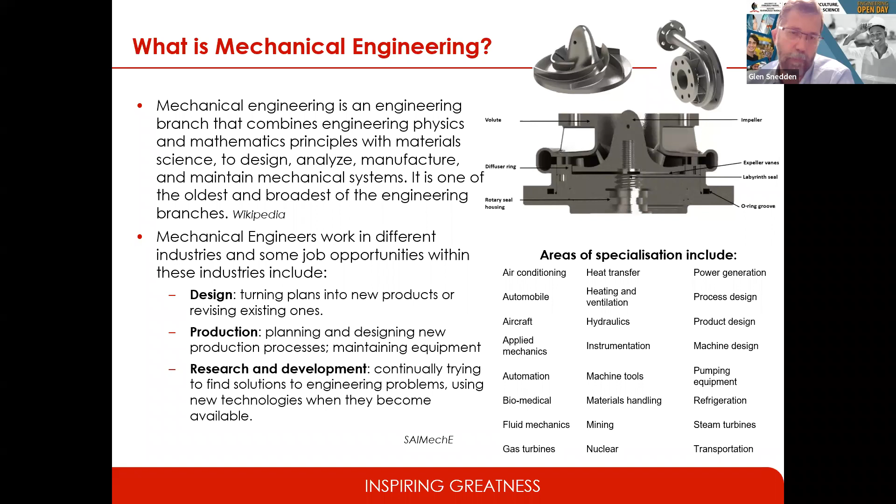These definitions are very wordy and off-putting. I rather prefer the more whimsical version given by Terry Pratchett: they had dreamed in a way that people usually use the word - not dreamed in the way people usually use the word, but they had imagined a different world and bent metal around it. That, to me, just sums up how engineers think. They take an idea, a dream, a possibility, and they create it from scratch using the tools at their disposal.

I just want to reiterate what the Dean has said: engineering is critical to growing the economy.

We've heard recently from President Ramaphosa how critical it is to grow the economy and how important it's going to be for our future as South Africa. And you're not going to achieve that without engineering. There is always going to be a strong drive for growing the engineering base in the country in order to grow your economy, to grow your jobs.

So I'm just going to take you on a little tour of what mechanical engineering is at UKZN and how we have deemed the discipline of mechanical engineering at UKZN.

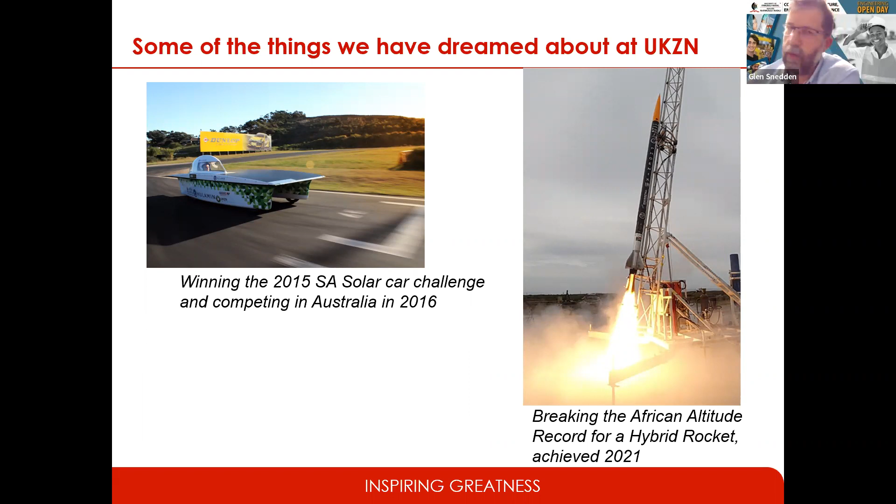And those are the projects, but behind those projects are the engineers who have dreamed them up. And those are the two teams. These are largely postgraduate teams by the time you get to breaking the record, but they all started off as smaller engineering projects in their fourth year at university.

So let's talk a little bit more about how you become a mechanical engineer and what mechanical engineering means at UKZN.

Firstly, we offer a Bachelor of Science degree in mechanical engineering. So you would graduate after 4 years with a BSc engineering degree. So it's an automatic honors degree, if you like.

Secondly, as mentioned before, it's an accredited degree. It's a 4-year program, fully accredited by ECSA until 2024. What happens in 2024, you ask? Well, we get reaccredited, and we are very, very confident that that will happen. I myself am an ECSA accreditor. Obviously, I don't take part in the accreditation of our own degree, but we have plenty of experience with this accreditation, and we know the quality of our degree.

Secondly, our degree is based on the Howard College campus. And that means it's local to KZN, don't have to go anywhere. It's right here in your backyard. You can get a world-class degree and work anywhere in the world afterwards by going to university right here in Durban.

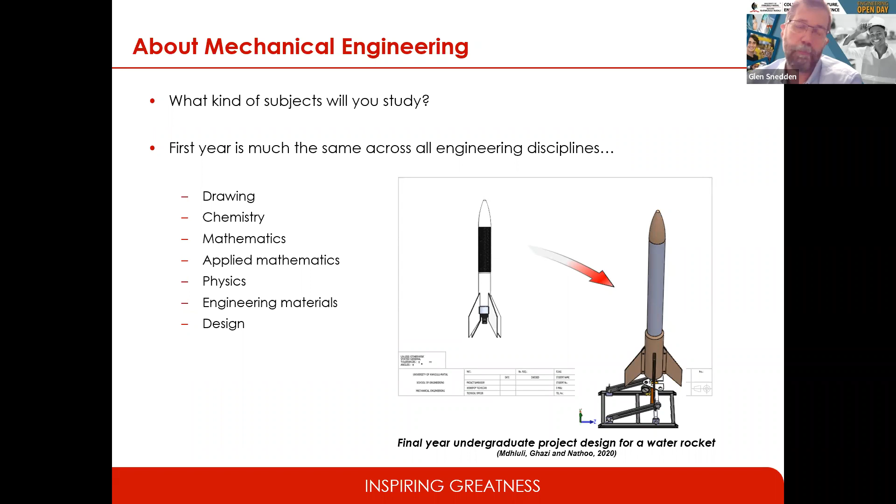So from second year, you will start to specialize in mechanical engineering. Now, what does that mean? I'm going to, as the Dean had suggested, use our own project, my own research group, which is the Aerospace Systems Research Group's project, to have a look at what that means. But you can draw examples from any one of our areas, from robotics, manufacturing, energy, biomedical research that we are doing in the department actively at our postgraduate level.

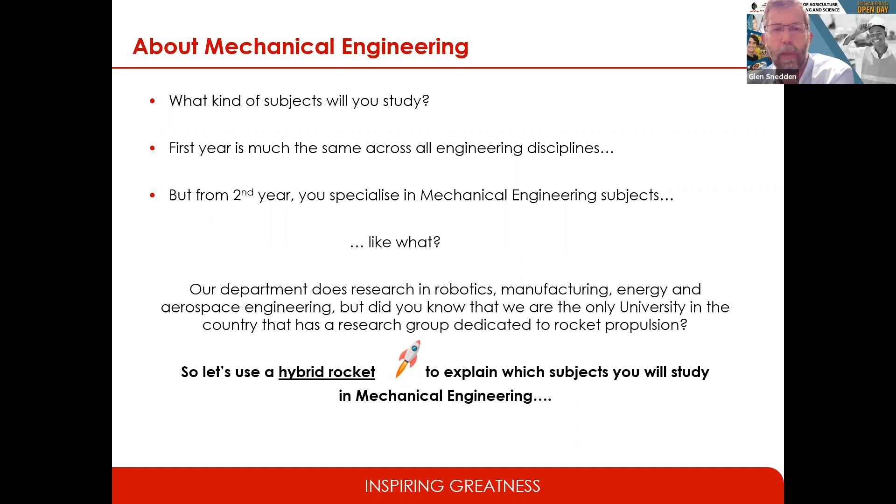And we're going to use a hybrid rocket to explain those subjects in mechanical engineering. So the first one you're going to do is design. As I said, an engineer uses maths and physics, but differently. A physicist might produce a fractal or look at some interesting corner of physics. An engineer will take that interesting corner of physics, figure out how to use it in practice, and turn it into a product.

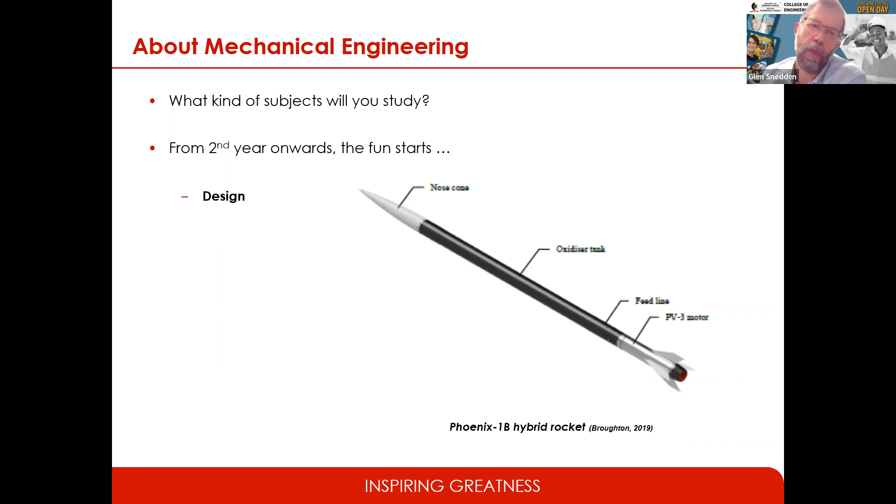In this case, there's our Phoenix rocket. That's the rocket that broke the altitude record. And every single aspect, every shape, every nut, every bolt, everything on that rocket has been designed according to the principles taught in second, third, and fourth years.

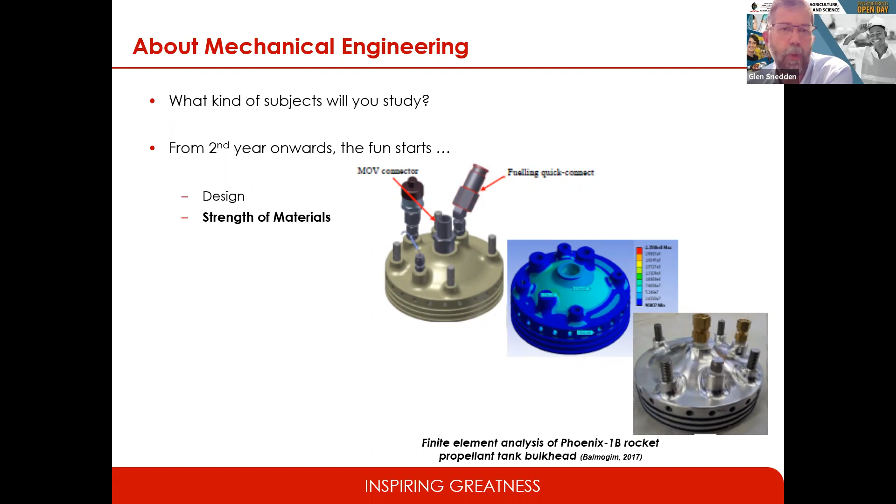But there are other aspects to dynamics. There's vibrations and mechanisms such as four-bar mechanisms. Your windscreen wiper on your car is a dynamic mechanism that needs to be analyzed and designed.

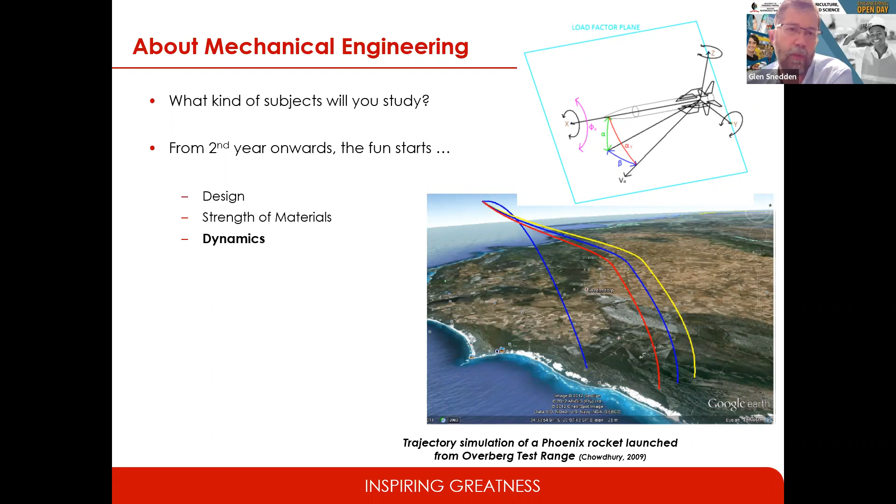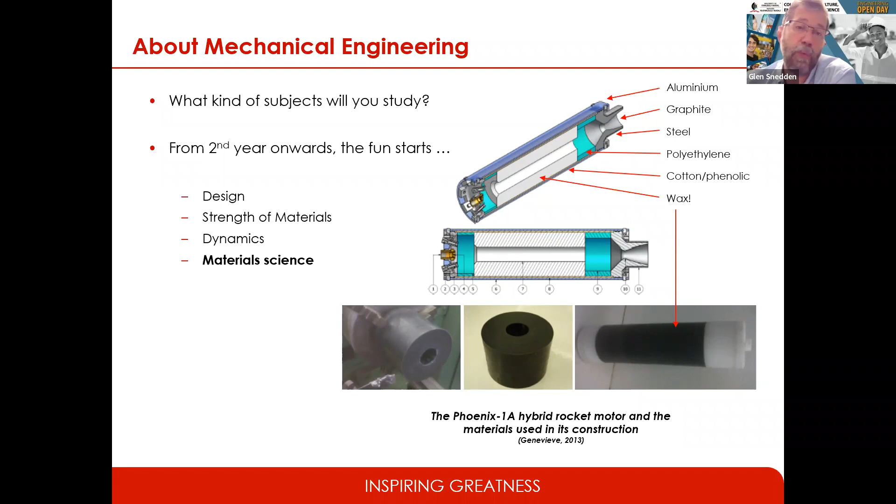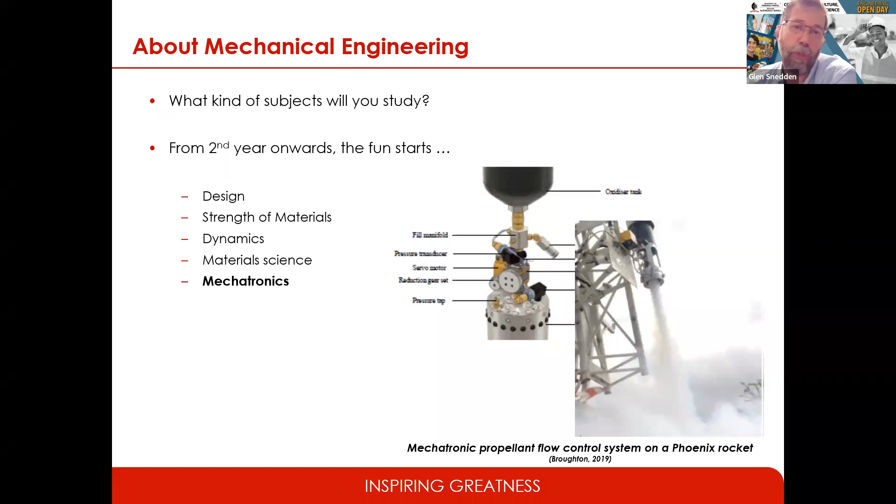Mechatronics. Many universities offer a mechatronic degree. We offer it at postgraduate level, and it's integral to our course in terms of the subjects you will do in third and fourth year. This is a mechatronic mechanism on the rocket: the valve that is used to open the oxidizer line into the rocket motor is controlled by an Arduino board, and it's a mechanical device with control, which is essentially what mechatronics is.

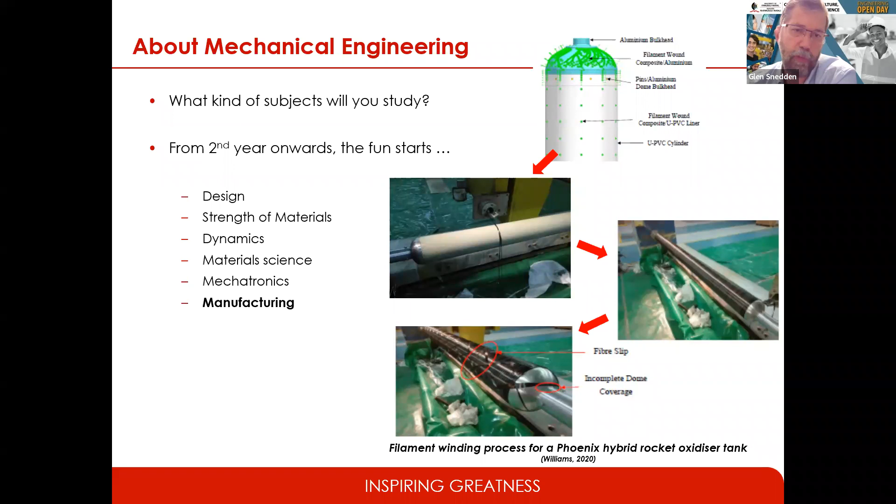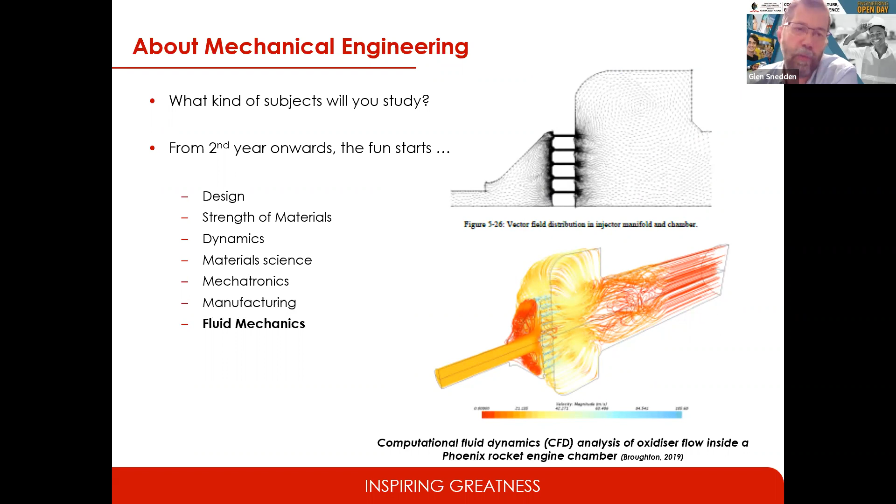Fluid mechanics, obviously it's a rocket, there's a lot of fluid mechanics going on. There's the aerodynamics of the rocket itself, but there's also the fluid mechanics of the injector going into the combustion chamber. Very complicated flows that can be analyzed using modern techniques.

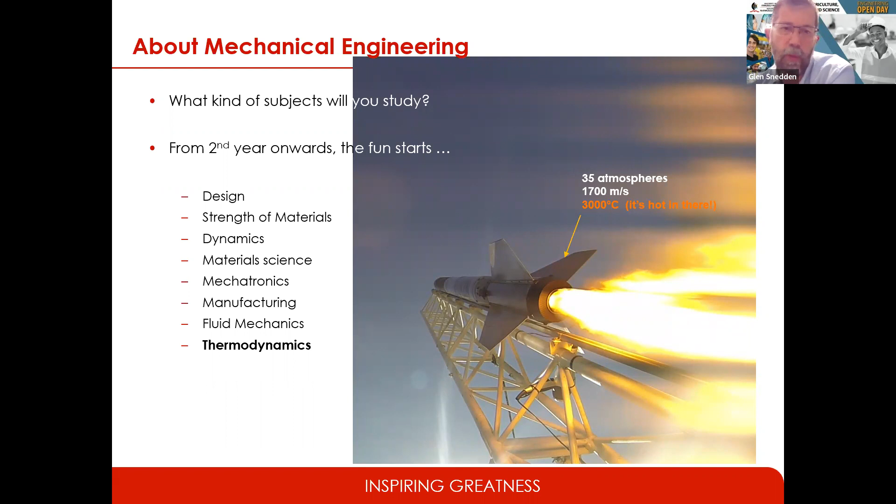And finally, thermodynamics. This rocket sees 35 atmospheres and 3,000 degrees Celsius coming out of that rocket motor. So there's a lot of high temperature effects. The design of the nozzle, for example, is all part of thermodynamics, the fundamental laws of the universe, all thermodynamic laws.

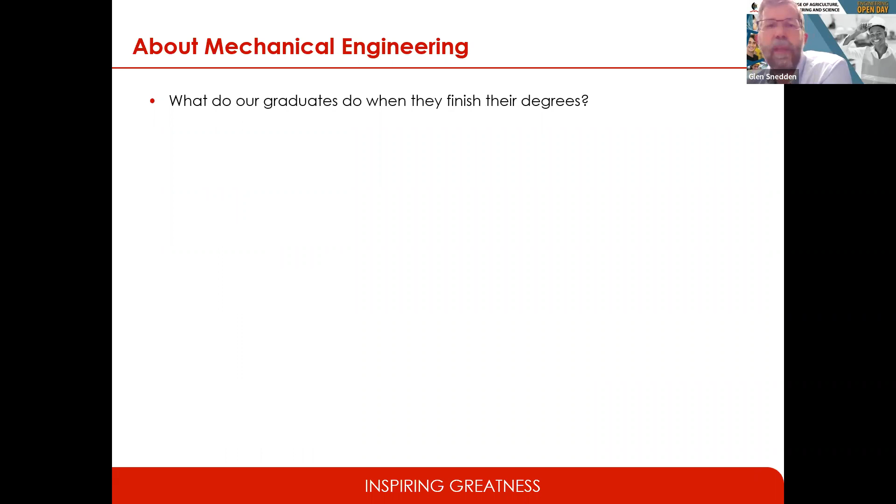So what do our graduates do when they complete their degree? Well, they work just about everywhere, in any industry you can think of. We might think of the petrochemical industry as being the domain of chemical engineers, and so it is, but there are a large number of mechanical engineers that go into that industry. Umgeni Water, Eskom, they all require mechanical engineers. In fact, you can probably trace some of our problems in this country to the lack of mechanical engineers working in these environments. So there is a great demand for engineers.

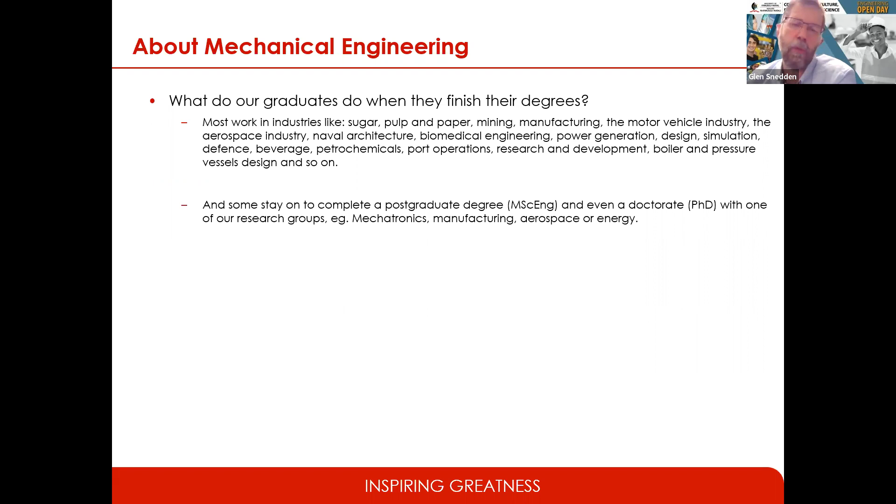Some graduates will stay on and do postgraduate research, either an MSc or even carry on to do a PhD. Here they will work in one of our research groups, which at the moment is largely focused around mechatronics and manufacturing and aerospace and energy. But there are also research groups in biomedical and drones, for example, and we do some materials research. In fact, it's very little known, but UKZN now has the largest aerospace research group in the country. So while you cannot do an aeronautical engineering degree here, which is really a specialized version of a mechanical engineering degree, and you can do that up on the reef in Wits, ours is actually the biggest aerospace research group in the country.

So engineering is really a very scarce skill, and we are certainly amongst some of the highest paid graduates in South Africa. It's a professional degree, and your skills can be used across the globe. So if you're good at maths and physics and you have a dream of designing the next big product, then why not come to UKZN and join in our dream?

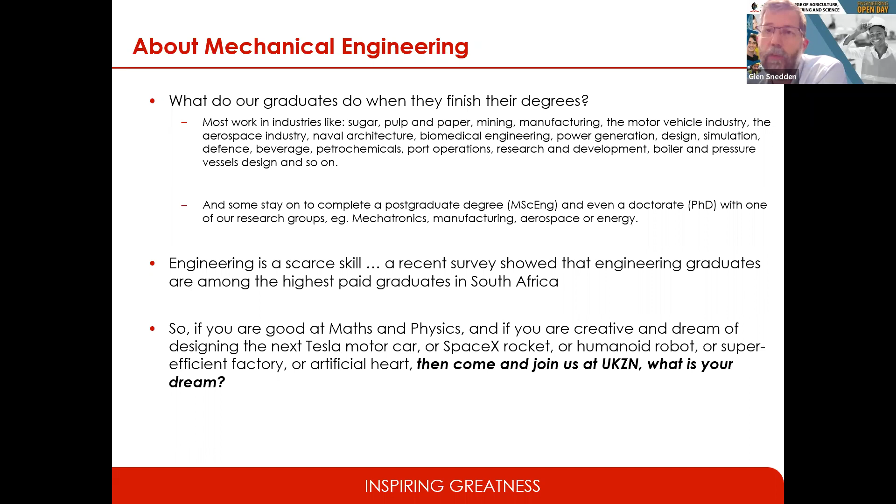And really, the sky is the limit. So there is our website, and there is the sky is the limit. There's our rocket launching on its way up to 18 kilometers.

But I also want to take this final slide just to mention what's coming. The Girl CAD initiative is starting up again, and I really want to encourage you to participate in that if you are one of those young ladies who is concerned about doing engineering because you've not had the opportunity to do engineering drawing at school. It isn't a problem, and we are offering a crash course in it.

I also want to say that as of next year, I'm hoping we will start up our engineering winter schools. That's exactly how I ended up an engineer, was going to an engineering winter school at UKZN. You'll be able to interact more hands-on with what the course is about. It might be too late for some of you, you have to make your decision now, but I would encourage those that have a little bit more time to actually take those opportunities. Thank you very much.

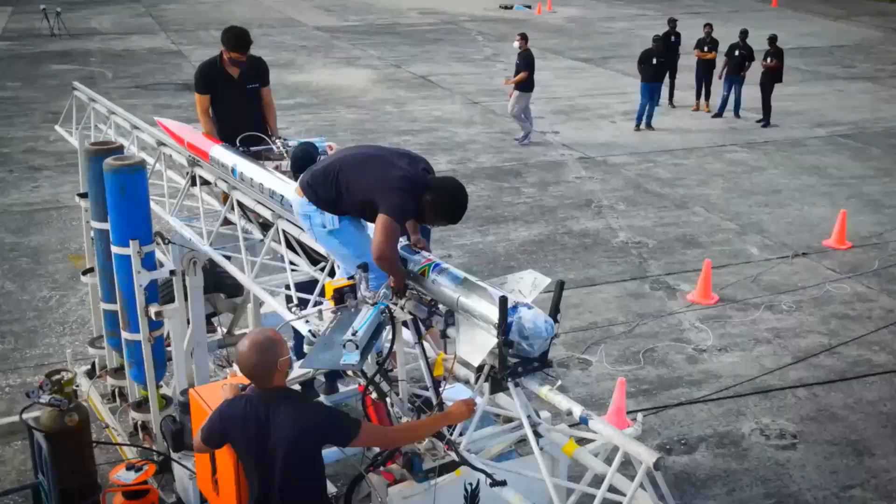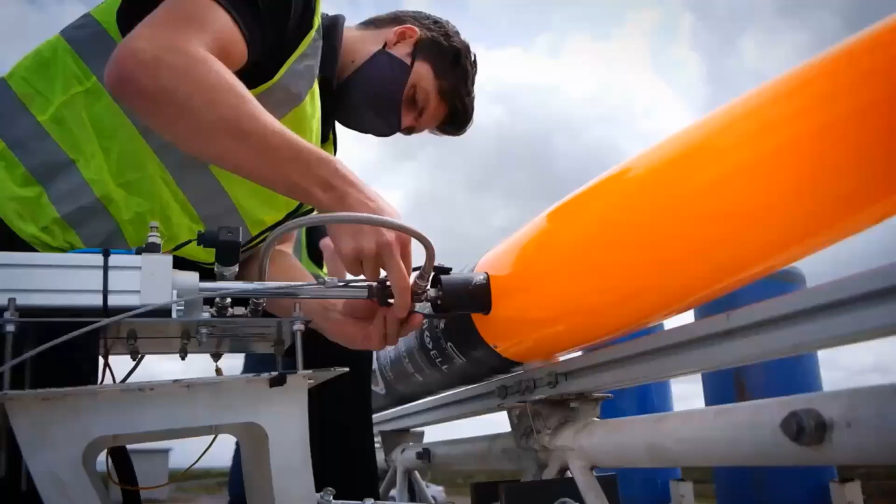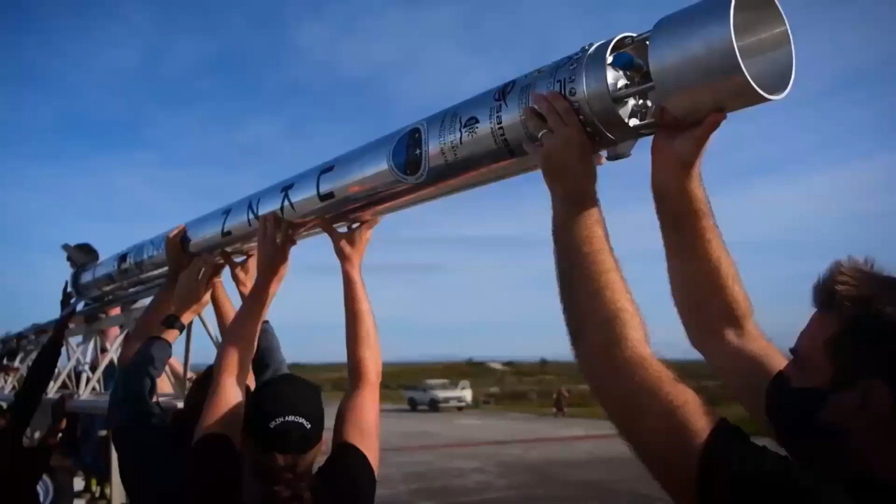The aim of this campaign is to test two rockets. We've got the Phoenix 1B Mark II-R, which is our high-speed rocket, and we're going to try and break the African hybrid rocket altitude record with that vehicle. The second rocket is a Phoenix 1B Mark I, more of a test platform to fly telemetry systems and recovery systems, and that will be a low altitude shot. We intend to learn as much as we can from both of these flight tests.

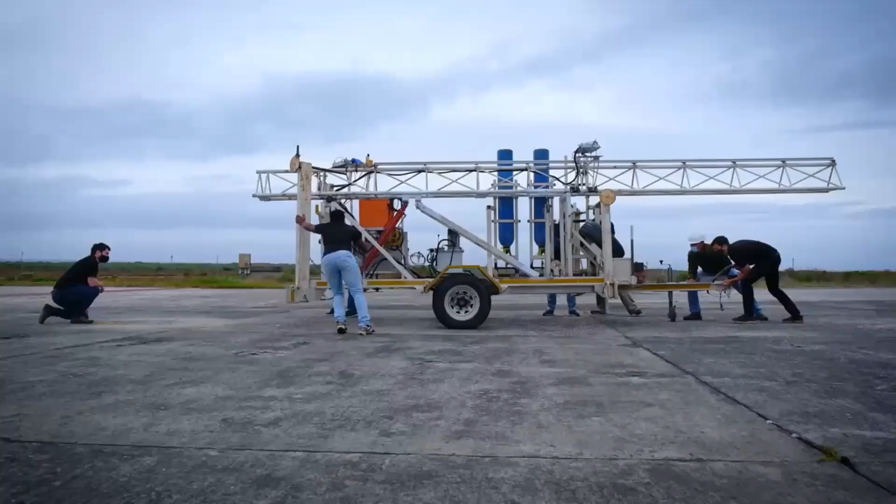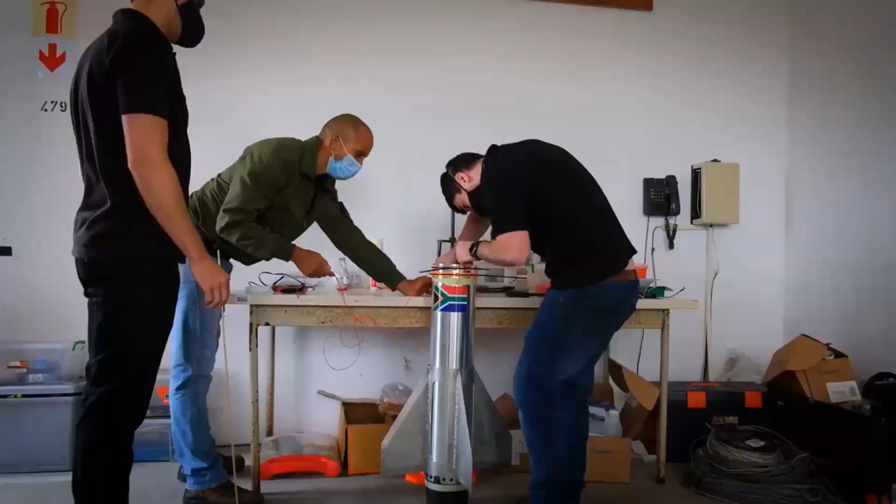Today we're launching the Mark II rocket, which is looking to break the South African hybrid altitude record of about 10.3 kilometers. So this one we're going to push to about 18 kilometers today, depending on wind. My name's Kai Broughton. I'm the lead engineer on this Phoenix hybrid sounding rocket project. I'm leading a team of approximately 10 engineers working part-time.

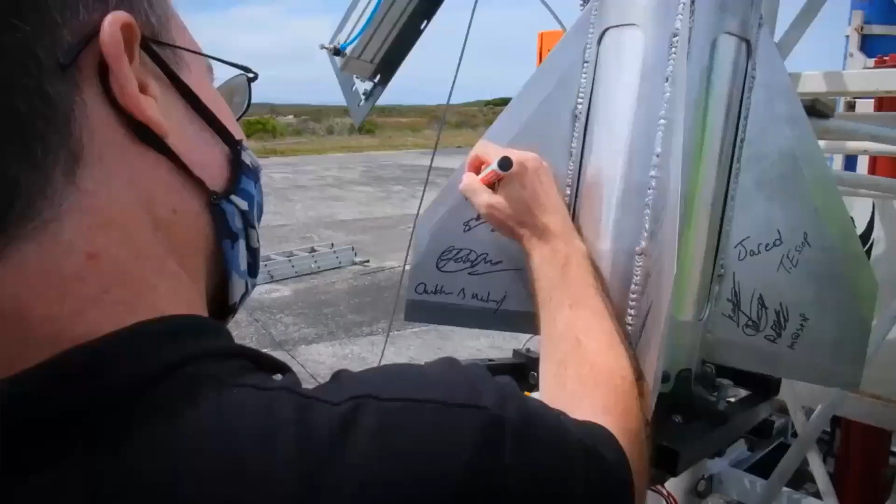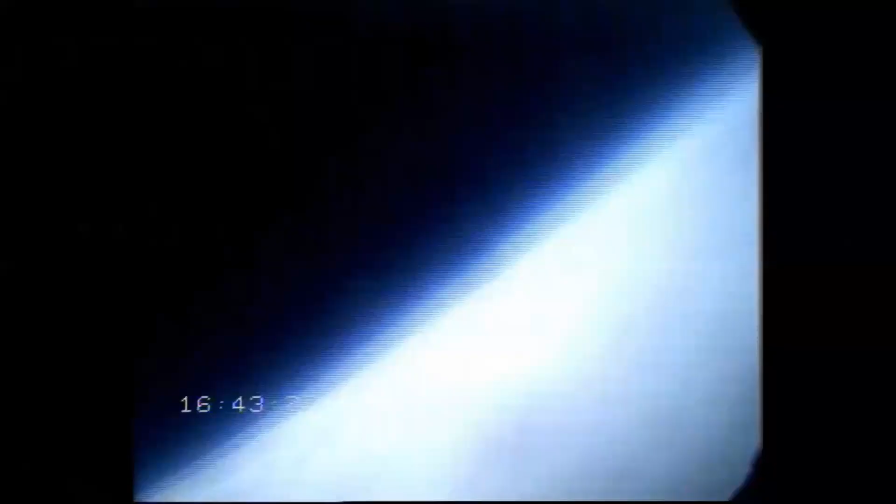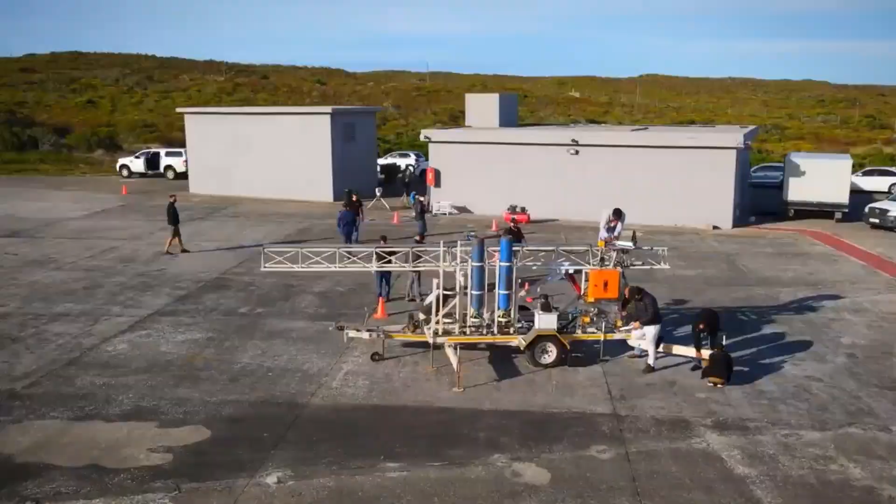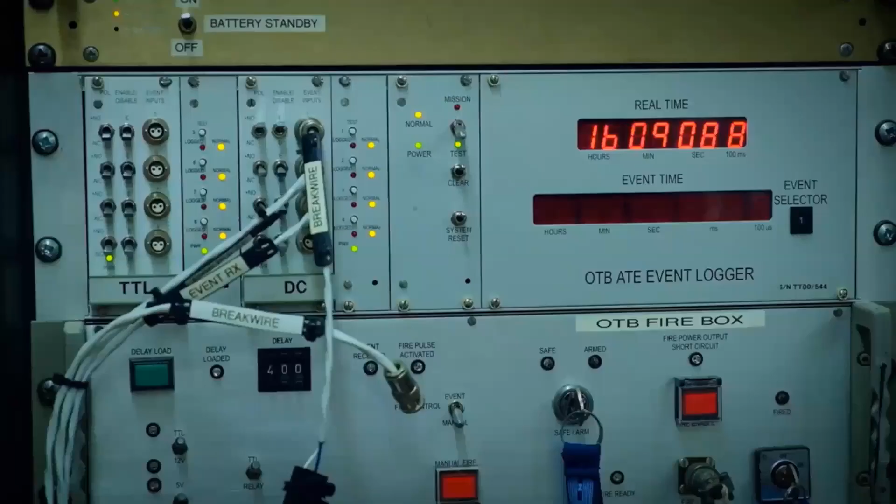Ready on your mark. Everybody stand. 9, 8, 7, 6, 5, 4, 3, 2, 1. Ignition.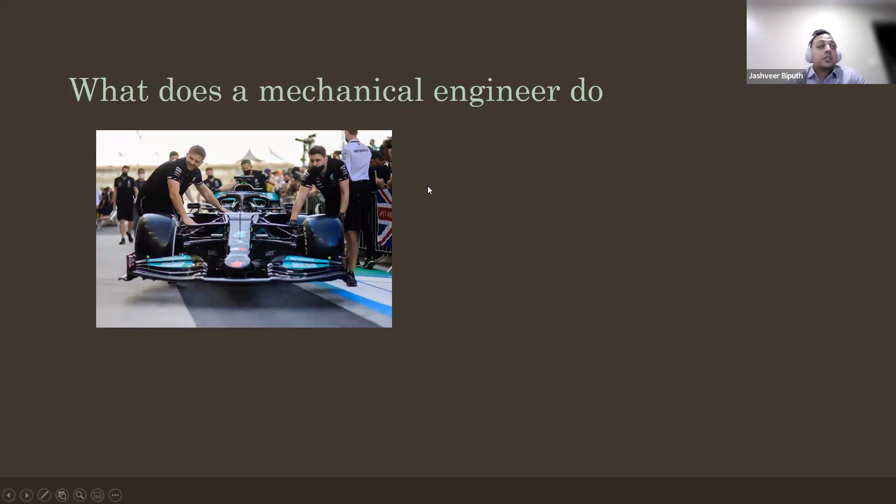So what does a mechanical engineer do? First of all, I think this is a great platform for young learners. I don't think I had it when I was at that stage, but when I was in school, like most of you are, this is what I thought mechanical engineering was about. I thought I was going to work for a Mercedes F1 team.

Obviously, some still do, and then later on you think, okay, maybe you're going to make a Falcon 9 rocket like Elon Musk. Or if you ask my parents at the time, they'll probably tell you you're going to be a car mechanic, which is totally not right. But what do mechanical engineers really do? So mechanical engineering is actually one of the broadest fields of engineering that you can find. Some of the careers we can read on the left-hand side as such, but I think in the South African perspective, if you're looking to stay in this country and work, I think the major

career paths that you take is either automotive, where we have a number of automotive plants in the country. We have Mercedes-Benz in East London, we have Toyota there in Durban, there's BMW in Rosslyn, Pretoria. Energy - Sasol, one of the biggest petroleum companies in the world, groundbreaking technology being used there, just all here in South Africa.

Manufacturing - we have major manufacturing companies, like ArcelorMittal for steel. We have fast-moving consumer goods in the form of Unilever, RCL Foods, etc. And then mining, which is a big part of South Africa - we have Anglo-American, Exxaro, Sibanye-Stillwater. There's major scope there.

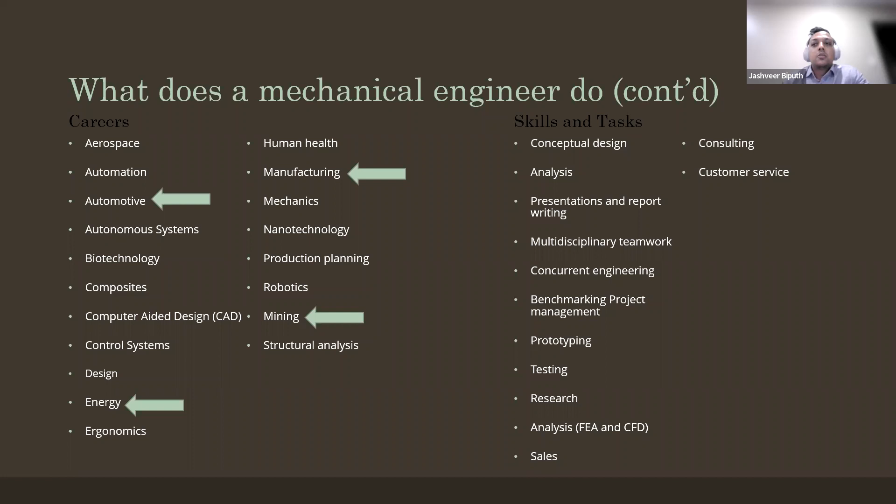It's nothing written in a textbook. It's the skills and lessons you learn at UKZN that help you achieve this, like failure root cause analysis. When something breaks, you don't want it to break again, so you need to do some analysis to make sure it doesn't happen again and put actions into place.

And then obviously project management if you're doing projects and that sort of thing. That's what I used to do in my previous life. This is what I do now. In the industry they call me a bulk material handling engineer. Essentially I design systems in mining and sometimes manufacturing areas where we transport material, such as ore in the mining industry. So basically you start off with a layout of a conveyor.

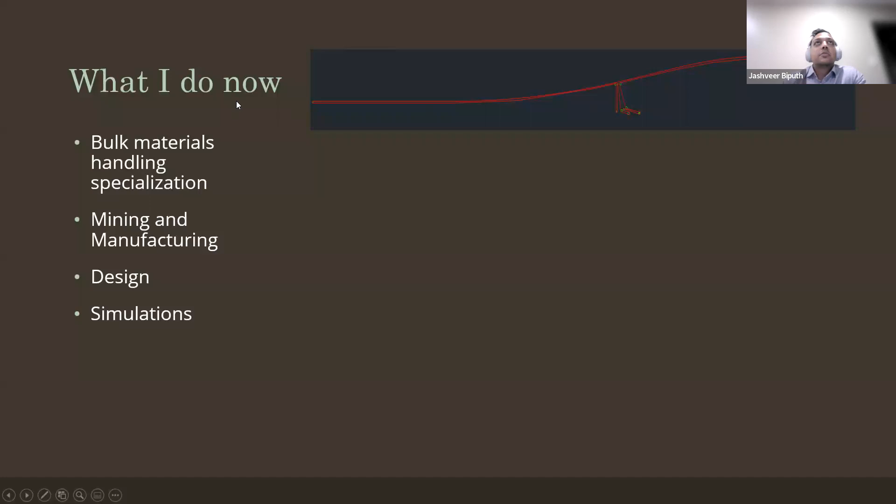For example, this is a conveyor. Then you do more engineering on it, and then you come to an analysis, also doing some simulation work. This is what we call a transfer chute, so one conveyor to another conveyor. In my line of work, I do the analysis on this using software and optimize the piece of equipment in order to get the optimal flow.

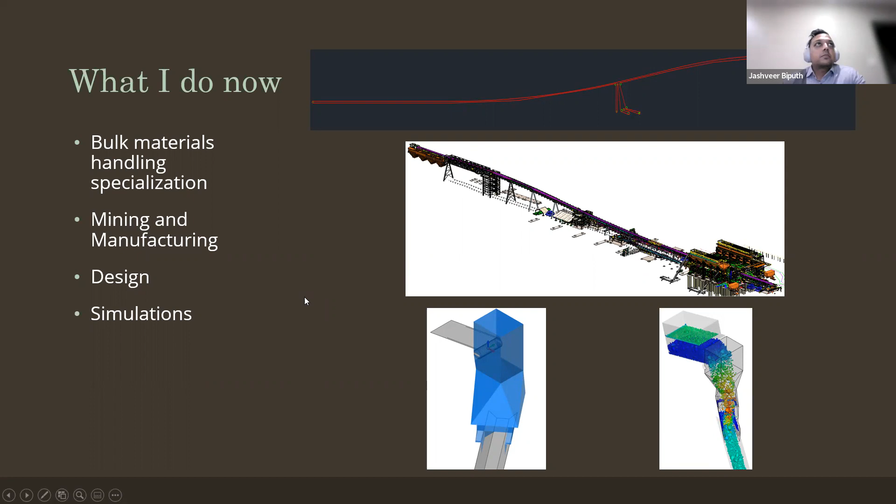So it is still exciting stuff when you leave university. I just want to touch on some of the highlights of my engineering career so far.

I talked about being a professional engineer with the Engineering Council of South Africa. A professional engineer is basically a certification you get from the Engineering Council of South Africa when you have demonstrated that you've achieved certain outcomes prescribed by ECSA. In the course of my career, it usually takes a median of 5 years or so, and then you are judged by a panel of your peers, and they sort of give you a final...

Sorry, I think someone's off mute there. Yeah, so in any case, what I was saying is...

You are judged by a panel of your peers, and then you are given this certification. In the workplace, how it gives you an advantage is, of course, in some areas it comes with a monetary advantage, but it also gives you more responsibility in the workplace. And from a legal point of view, you're also termed responsible for designs, and you can sign off designs for construction, etc.

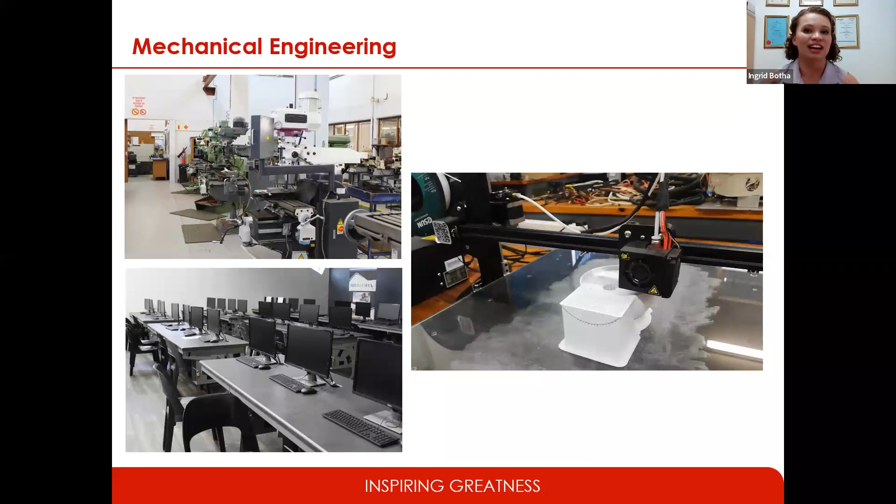Thank you very much, Mr. Biputh, for your inspiring account. I hope this has given everybody a taste of the exciting things that wait for you here in mechanical engineering. So whether it is rockets, cars, robots, or hovercrafts, there's no dream or idea too great or too strange when you come and study mechanical engineering at UKZN. And over and above that, our facilities, whether it's the lands, the workshops, or the labs, allow you to achieve these dreams and make these ideas a reality.